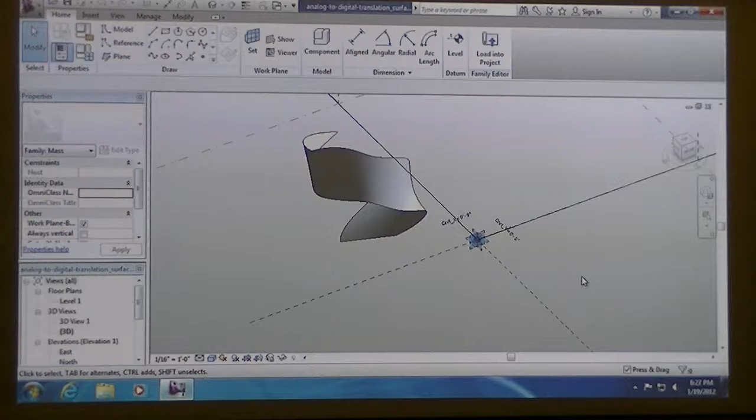It's not doing it. I need to find out a couple things from you. So we just need like a blank one up. Are we gonna follow you or just listen? Yeah. You just need to open up a new conceptual environment for today, a conceptual mass, and we'll work in there.

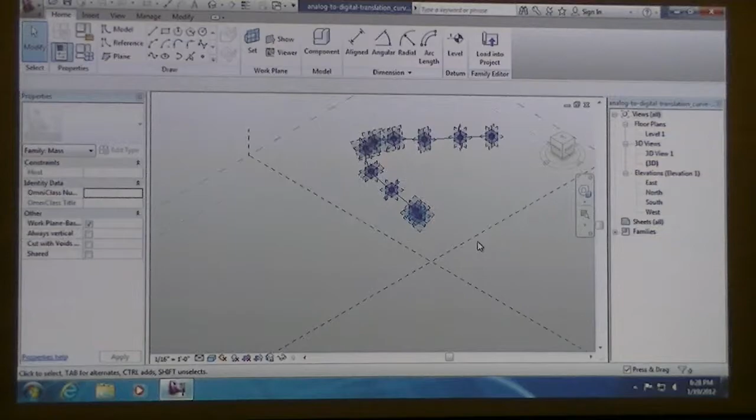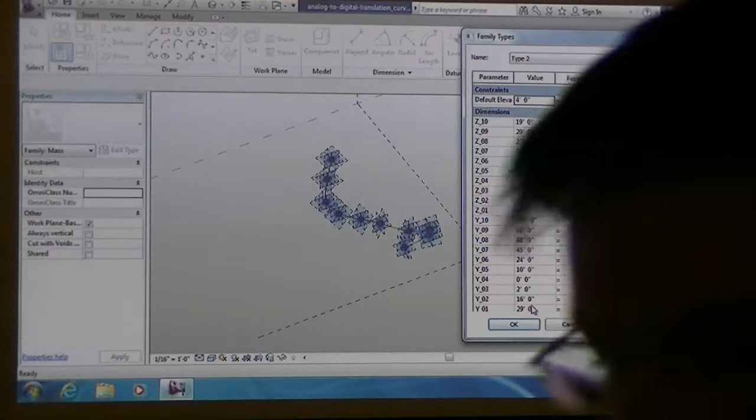All right. You almost got everybody. Looks like we have another computer running. Yeah, whatever number that is, number 2 maybe. Brian, you can move up to number 2. Right. Yeah, but I was working with you. I mean, it'd be amazing if everything just worked at one time. Welcome back, Rusty. Welcome back. Thank you. Oh, the computers that were not working.

All right. So, what kind of issues are we having? What kind of issue are you having? I need some therapy. I think I've heard maybe three issues so far, and I'll go over them, and then maybe you guys can add on to them, or maybe you say you've already resolved them. Number 1 is some people are having behavioral issues with their spline, meaning that you have all of your points and it wants to connect them in different ways than you're expecting them to.

Anyone having that problem? Mine's lofting the different splines not in the order that I'm clicking them. It will spline between the points correctly, but then when I go to connect the lines together, I think I came to like the 8th one I made. If I added that one, it would just completely change the order, even if I clicked them in the correct order. Okay, so you've got a series of section curves. Yeah. And the first 7 I made, it was doing them in order, and then I made another one, and whenever I tried to add that one, it completely changed the order of the connections. Okay.

What about accuracy of placing your section curve? Once you've made your curve, you should have a curve type that you've experimented with, and you've got a series of points and maybe some parameters. And if you bring that in to the other environment, like we did in class, we placed it attached to another point that we can move. Some of you were talking about, is there a way to make that a little more accurate as far as how to place that curve? Anyone having issues with accuracy?

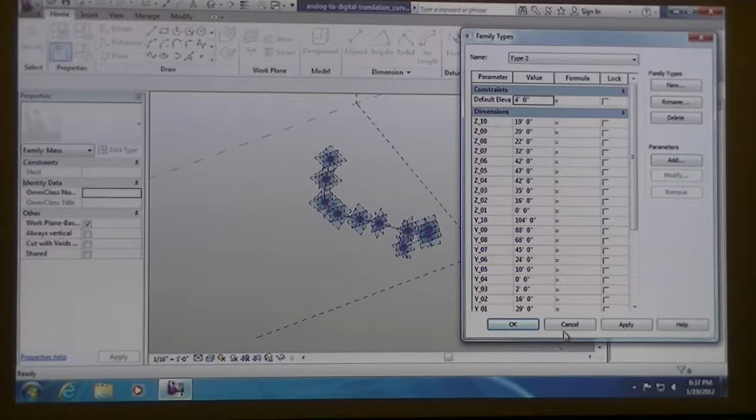So one of the things to solve the issue where some of you have had some issues with your spline: you've placed all of your points, you've got all the different parameters happening, and what you don't see here is I've turned off my dimensions in my visibility graphics so that I can actually see what I'm doing from time to time.

So, remember to hit VG, and this allows you to look at model categories and annotation categories. Anything that is a dimension or a text or any kind of label is an annotation. And so it gives you the ability to turn off your dimensions and things like that too. So if your drawing really starts to get kind of heavy and you just want to see the final product at the end, you can just turn off the dimensions in your visibility graphics.

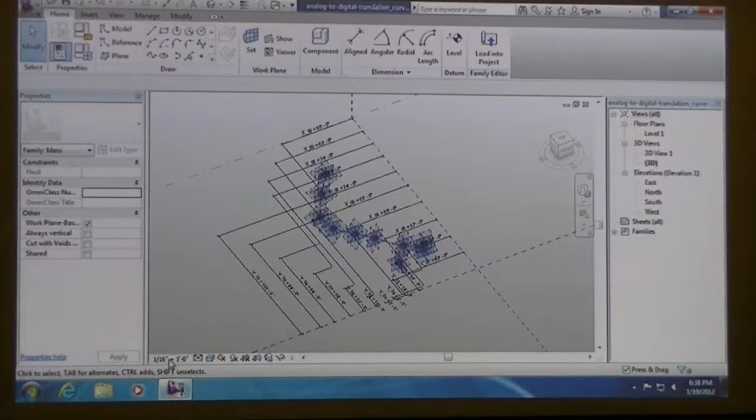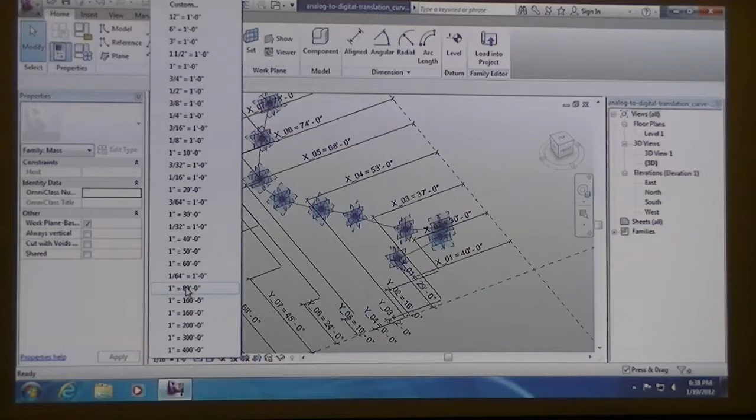The other thing is down at the bottom, I think by default, this is set to be something like, maybe 16th is probably the default. If you happen to have a lot of dimensions and these numbers are really big, you just change your scale down at the bottom to something like quarter scale. You can see how the text and everything that was associated with the annotation scales down.

This is still shown at full scale. It's just the annotations have scaled to show up as they would if you were to print at quarter scale. That's really all that scale is saying. But what that does is it allows you, when you start to really get a lot of different dimension strings and everything associated with your family, sometimes you might just want to bump up the scale so that you can actually read and still see what's going on.

So what I'm going to do is, let's close out of what I'm showing you here. And if everyone can open a new conceptual mass, I'm just going to go over a real quick process of where I would probably start, and then maybe you guys can share a little bit of your methods, whether you've done it in a similar manner or if you've got another strategy that you're looking at.

The first thing to solve is the idea of where's our origin point going to be. So I'm looking at my floor plan, and I'm associating it with my analog model. And I want everything to be associated with the lower right-hand corner of my model, and I'm just picking that. You guys might have to pick a different one, but essentially I want everything to grow in the Y and the X in this quadrant, sort of the northwest quadrant when looking at a floor plan. You might want it to grow in another way, but basically the point is you want to be consistent. You want everything to be growing in one direction.

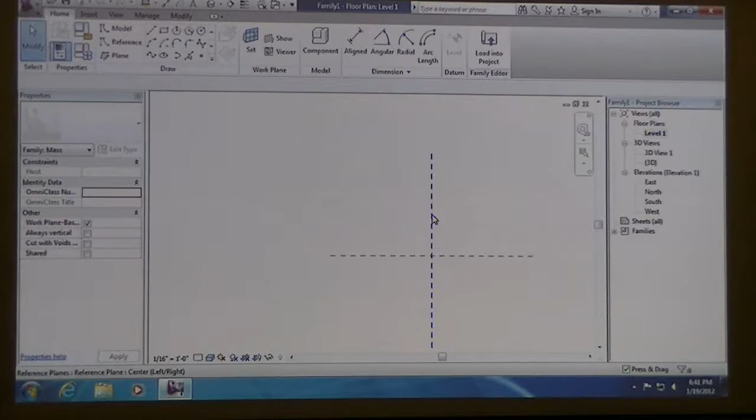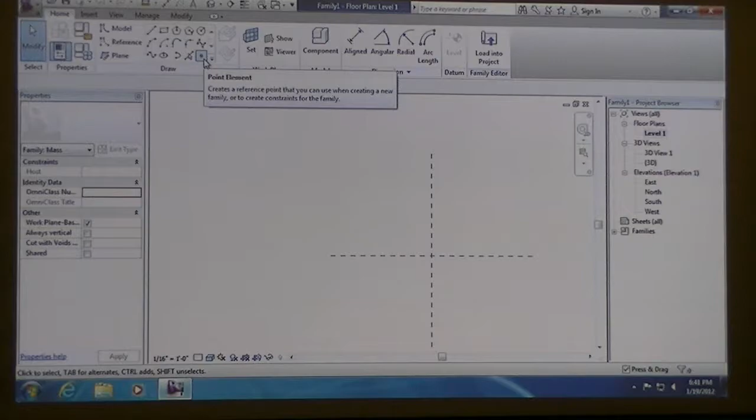If you've got points kind of going back and forth, it's okay, but you just have to realize that you're always going to be stuck with that point being manipulated only in that quadrant. So just think about that as you start to set things up. But because I said I could do everything in 10 points, I'm not going to go over every point and how you might do this. I did it in my lunch hour. It would take us our whole class right now.

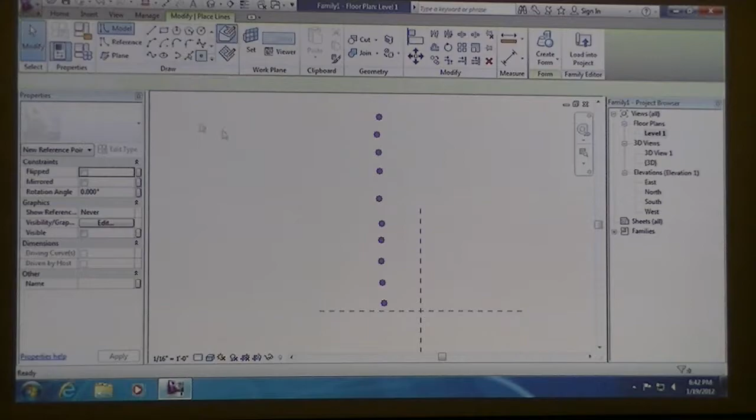But I want to show you that, so I know everything's going to be in this quadrant. Before I even start, I know I'm going to have 10 points. I'm just going to go ahead and place 10 points throughout this quadrant. Let's see, 1, 2, 3, 4, 5, 6, 7, 8, 9, 10. And then I'm going to select them all and turn on my reference plane.

Before I start manipulating where all of these points are going to end up in space, I'm going to select them all and create my spline through points. By doing this, I've already established the order in which that spline is always going to travel, and it won't ever act in a random way. Revit doesn't understand how to connect all of the points if your curve gets too complicated, and it has to do with the algorithms programmed into the spline tool - it's trying to take the average between two points, finding the closest and the average mean, and that's how it decides how to connect all the points. If those numbers get manipulated in an obscure way in the computer, that's when you get into behavioral issues. By doing this, all our splines will always act the way we want - it'll act in the order.

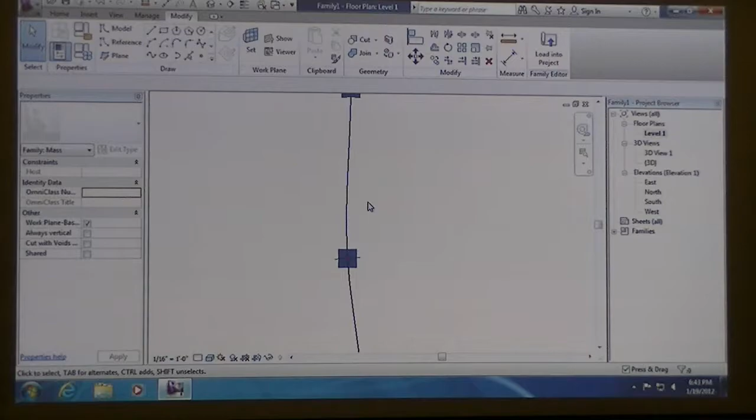So once I've done all that, I'm going to select all these points again, and I'm going to turn off the show normal so that I get all my X, Y, and Z planes on each of those points.

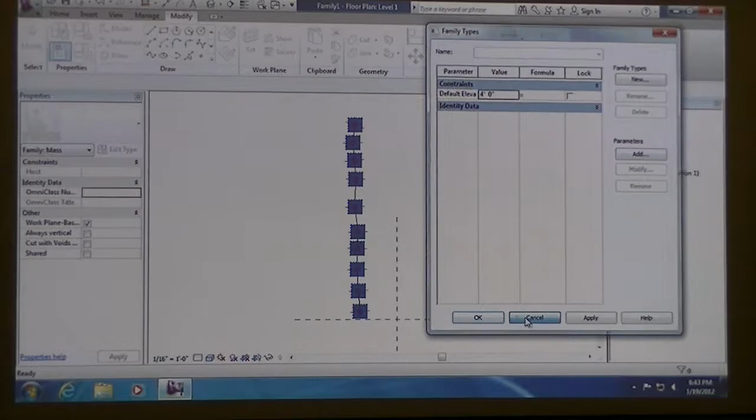Now the next thing I would do is, well, you can do two things. You could go into the family types and start setting up all your parameters - you know you're going to have an X, Y, and Z for each point. This is going to take a little bit of time, and I'm not going to go through every point right now because I've got the file I can show you. But for what we've already done in class, you set up your X, Y, and Z for each of those points, and then you can go ahead and start doing each dimension.

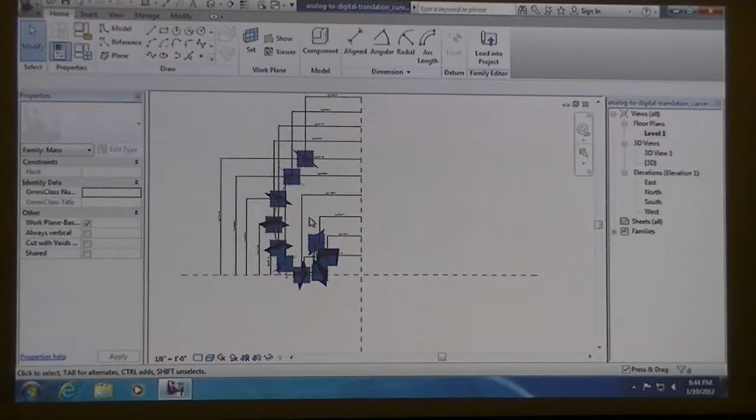What I'm going to do is just load up my other file so we don't spend a lot of time here, and you guys can just look up above. So what I did is I set up - you could do it this way - I named these basically X1 through 10, Y1 through 10, and Z1 through 10. You could also just say 0.1 X, 0.1 Y, do all that stuff, whatever you want to do. But once I establish that...

I can then just start making all of my curves - let's see what I have here, my dividers. You might pull out a set of dividers or your ruler or your scale. And I've established that this is going to be at 16th scale.

You can essentially say, okay, for the first point I've marked on my form, I'm going to go from this 0, 0, 0 point - how far over is it at 16th scale? That's the number I'm going to enter into my X1. Then I might do my X, Y, and Z, but I might just do all the X's of the point, so I go to point 2 and follow it all the way around. I keep going back to this corner point, referencing how far this point is from that corner in the X direction at 16th scale, then do the same thing in the Y, and then the same thing in the Z.

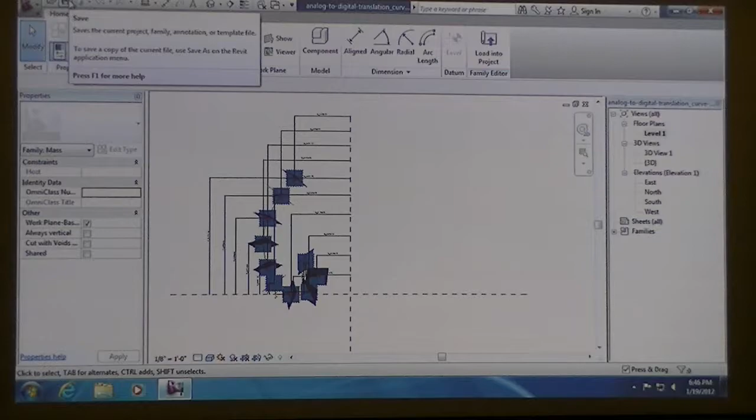And that will program one curve type, then I would just go back. Once you get that set, or enter a couple of these values, I'd hit apply and OK, and hit save, because once you've got that dialog box open, you can't hit save. So every now and then you might want to close out of the dialog box and go ahead and save your work. Once I've established type 1, I might go to type 2 and start a new family type, and it's just a matter of doing the same exercise. I could do that for every single curve - all I'm doing is programming this one curve to act like every single curve on my model.

And then this way, when we actually bring it into the new environment, it's just a matter of selecting that curve and placing it on the reference point. So you use the one curve, but you'd still measure all the other curves. I'd use the same curve, so I get the same parameters, but when I'm on point number 5 of this curve, my x and y is definitely a lot different than on point 5 over here. So basically that's all that's happening: how far is that one point occurring?

And so what you really have to do, since it's going to be one curve, is establish a worst case condition and say, how many points do I need to make that worst case condition? So for instance, on these very simple curves, yes, I could probably do them with less points, but I still need to use the 10 points so that I'm still using the same curve.

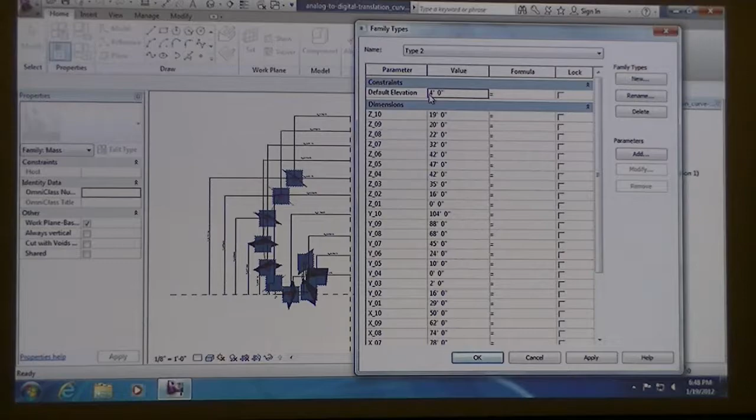So I saved my original starting point. You can see this was how I started off. I just had everything up in a line, and that's where I established all of my dimensions. And then from there, I have my type 1 curve, and then my type 2.

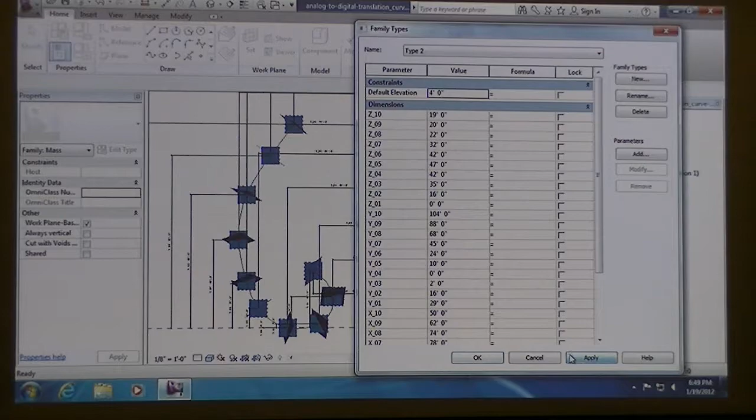And then from that, once you're done, let me show you a method of how we can place this into the next environment so that we ensure, again, that we're using the same reference point at the 0, 0, 0, which will help you place your initial curves to really replicate what you've done in an analog model.

So what I'm going to do is keep this open, and then I'm going to go into user interface and start a new conceptual mass.

And I'm going to place a point, and I'm just going to place it up here in the space. Doesn't matter where at the moment. And maybe you guys can all place a point too in your own conceptual mass, because I'm going to show you some new tools that might help you work in this environment.

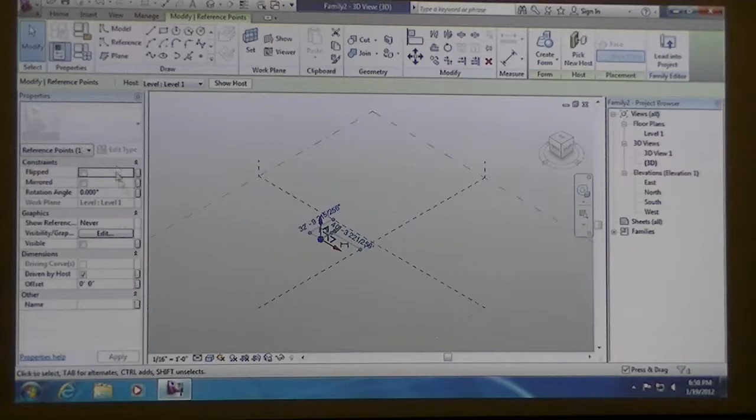So once I've got this point, I'm going to turn on all of my different reference planes that are associated with it. But in order to get this to be precisely at 0, 0, 0, this little crosshairs, I'm going to use what's called, under modify...

You have all of your transform tools up here, which are your align, your moves, your offsets, mirrors, copy, and trim and extends, and scale. These are all your ways of transforming any kind of shape that you have or line.

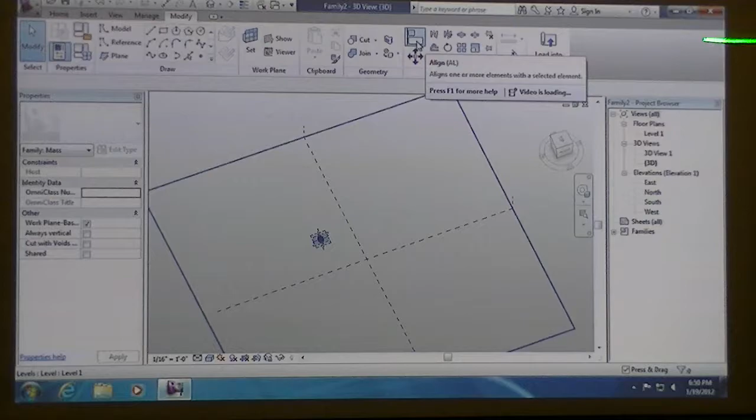But one thing that you'll use a lot is called the align tool. The align tool is actually made for, well, what it says, to align one element to another, but it's also made to lock and set up constraints later on when we get into that. So we're going to be using this tool often, so you probably want to just figure out its methods of how you actually would use it.

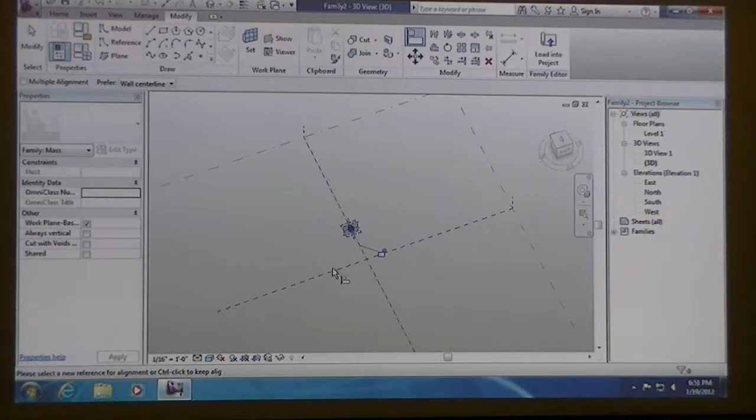What it's asking you to do, you can look at the lower left corner of any tool that you pick, it always shows you what it's asking you to do. So it's basically saying to select whatever you want the main object to be that you're eventually going to align this point to. So first I'm going to pick one of these planes, and then I'm going to pick the parallel plane of the point. And then I'm going to do the other one and this one, and that ensures that I'm now at 0, 0, 0.

And by default, this point has an offset at 0, so I know I'm right at that intersection.

I have my other curve worked out, and you might not have a curve to bring in, so you may have to follow along on the screen. I'm going to load this into the project, and in order to place this curve type 1, remember that in the curve type 1 or curve type 2 family, I established everything off of an origin point. Whenever you're placing any kind of family, you're placing it always by its origin point, which is this 0,0,0 in that file.

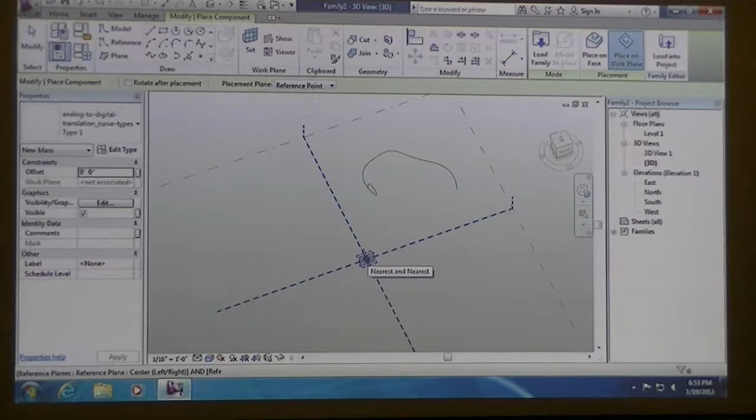So if I place it at this 0,0,0, it'll be exactly in the same position it was on the other file. What I want to do is place it on a work plane, so I need to pick place on work plane. Then my placement plane, I still need to pick this point or this horizontal surface. I'm going to left click, and when I left click, it's now asking me where to place it. If I hover over 0,0,0, you should get both of your crosshairs to highlight, meaning you're snapping right to the 0,0 plane. I'll hit left click.

Now I have that curve exactly in the same quadrant. I'm going to take this point and give it a name. I'll call this curve type 1, so that I know this point is always going to be associated with this particular curve that I placed.

Next thing I'm going to do is place another point so that I can place my type 2 curve. But before I do that, because I want this point to also be at 0,0,0, you'll often get an error.

It says, hey, did you know you placed a point on top of another? You've probably seen this - you have 2 points in identical locations. I always tell Revit, so what? I know I put those 2 points there, but it just gives you a warning once in a while that it's thinking you have duplicate objects. Sometimes if you happen to place too many things on top of one another and you don't need them, it's just giving you that warning.

I ignore that warning, but before I do that, so I have the ability to select this in an easy way, I'm going to take this point - if you look at the bottom of every view window, you have these little eyeglasses. The eyeglasses are your temporary hide and isolate commands. Anything you select, you can temporarily hide in the view. This gives you the ability to work, especially when you start getting a lot of things on top of one another in 3D, or even in 2D sometimes.

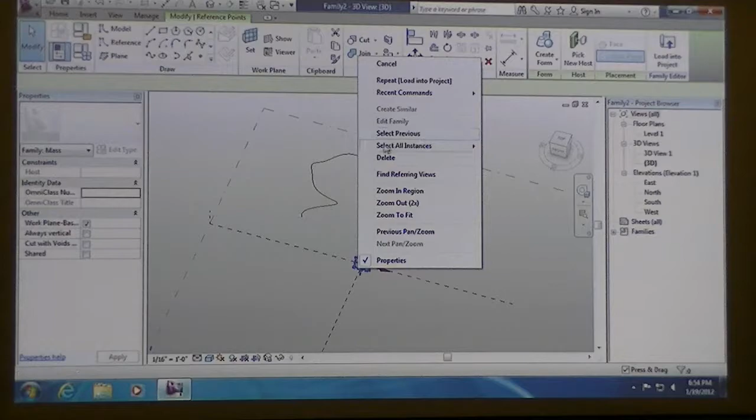You need to hide some things to isolate what you're working on. You don't want to do it in a permanent way, because sometimes you can right-click and say - this doesn't actually give you the option here. So in this environment that option's not there, but in the project environment, sometimes you can right-click and it will say you can hide something in the view. Once you do that, it's kind of hidden permanently, and you have to always come back and find it and unhide it from time to time.

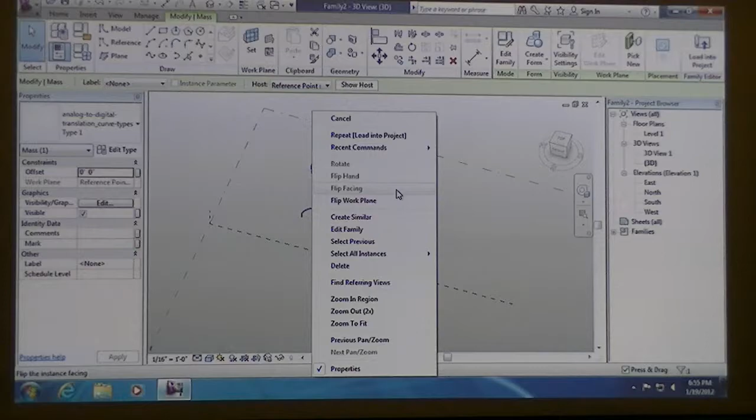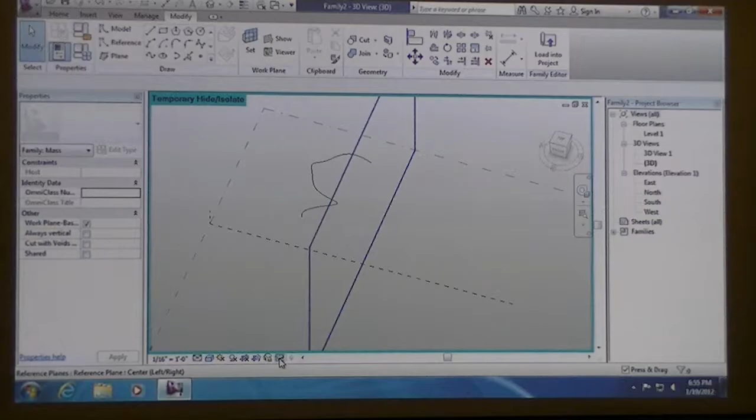If you do a temporary hide, I'm going to click on the eyeglasses and say hide element, it goes away. Once it goes away, you get this blue box around your screen, telling you in the left corner that you've hidden a bunch of stuff in this view that you're not really seeing. At any moment, you can come back to the eyeglasses and say reset temporary hide and isolate, and it brings everything back. The other thing is if you save your file, exit, and open your file back again, all of your temporary objects that were hidden are revealed again. So that's why it's temporary - it's not going to be permanent once you save it.

So again, I'll go back and hit hide element. Now I can place my other point, and I'll do it in the same manner. I'll just place it off into space, turn on my reference planes, and use my align tool. And there's my warning again - hey, there are identical points in the same place - and I'll say whatever.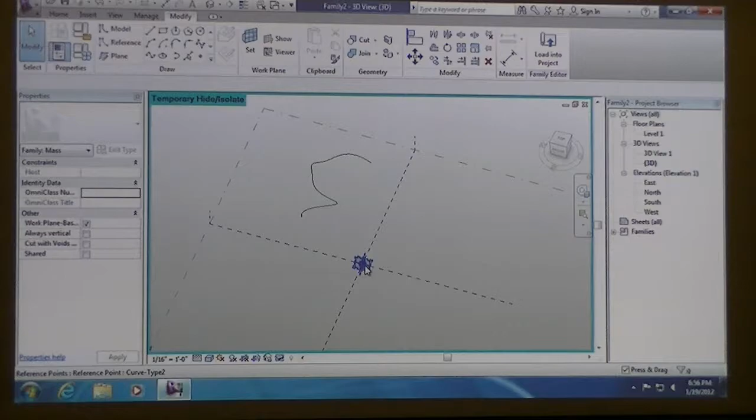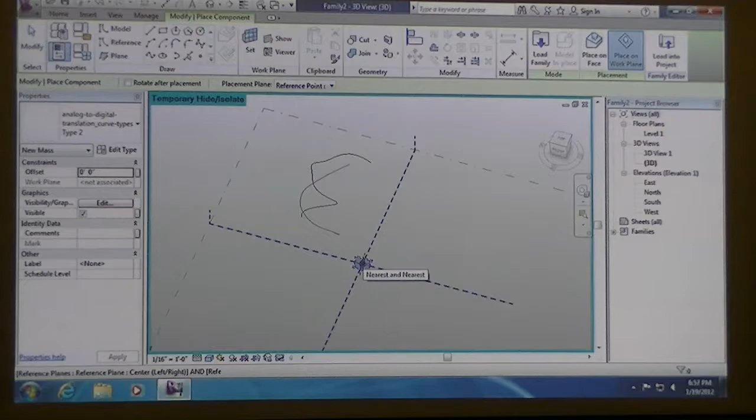Obviously, you can only have unique names. Now that I have that placed there, I can click on Home and Component, and because I've programmed all of my curves, all I have to do is pick my type 2 curve, again, place on work plane, and I need to pick it, and then make sure both of my crosshairs highlight. And so I should have both of my type 1 and type 2 curves as they occur in relationship to my analog model from that 0, 0, 0 point.

At this point I can go back and just reset my temporary hide so I reveal both points. And you notice when I hover over the points now, because I named them, when I hit tab, you'll see at the very bottom it says curve type 2. When I hit tab again, it says curve type 1. That gives me the ability to then select the different curves.

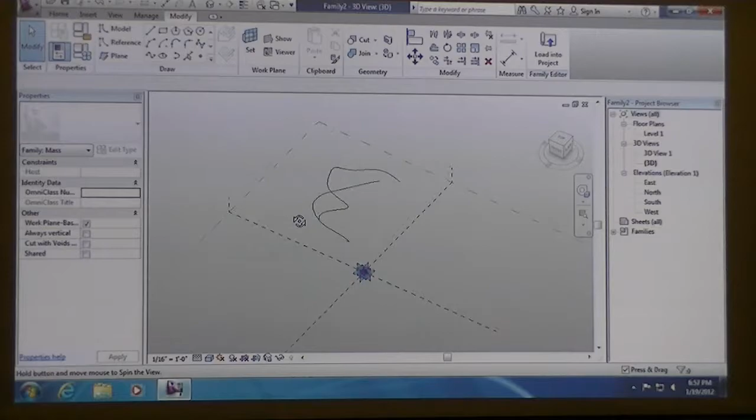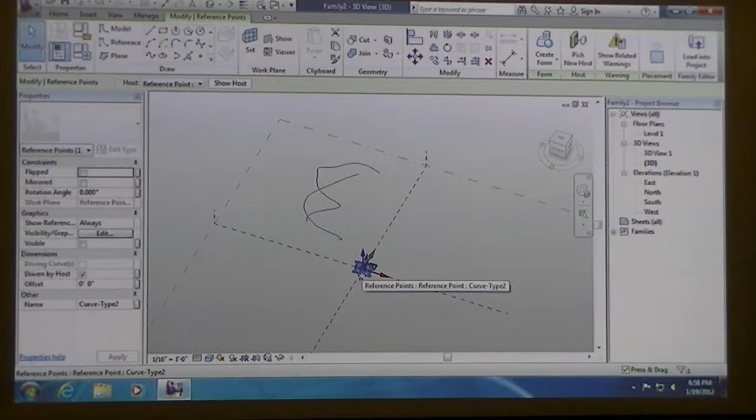And so you would put a point there for every curve. So say you have 10 different curves, you put 10 different points right there, so that we're always referencing that 0, 0, 0. And the reason for this is that it just gives you the alignment. Everything will always be aligned to the same spot. Then we can play with the position of this point later on, whether it's up and down, twisted, or whatever. Once I have these section curves, I can just hit Create Form and hit Solid Form, and then I've got my lofted shape.

Some of you might have a shape that looks orange. Anyone have an orange shape? Okay, I saw that. Anyone else? You have to make sure that when you do Create Form, you use the solid form and not the void form. If it's a void form, it'll turn out this orange color, which means when you actually bring it into any kind of environment, it won't appear because it's a void.

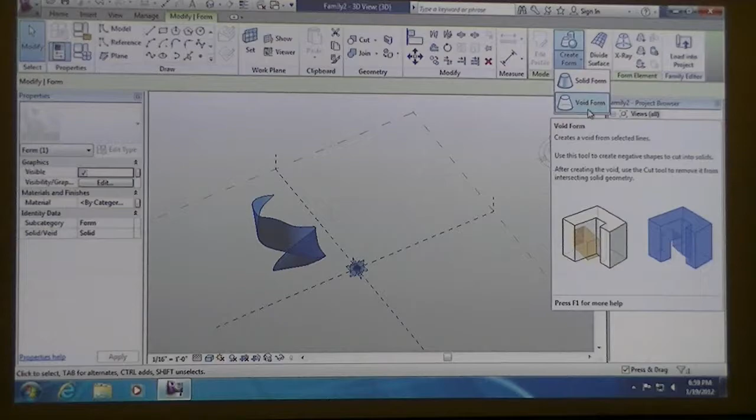It's invisible. If you happen to have an orange form or you've accidentally selected it, whenever you select your surface, you have these properties down at the bottom, identity data, that says solid or void, and it's set to solid. I can just click on this and change it. So if you accidentally have the wrong thing, you don't have to redo your shape, just change that property.

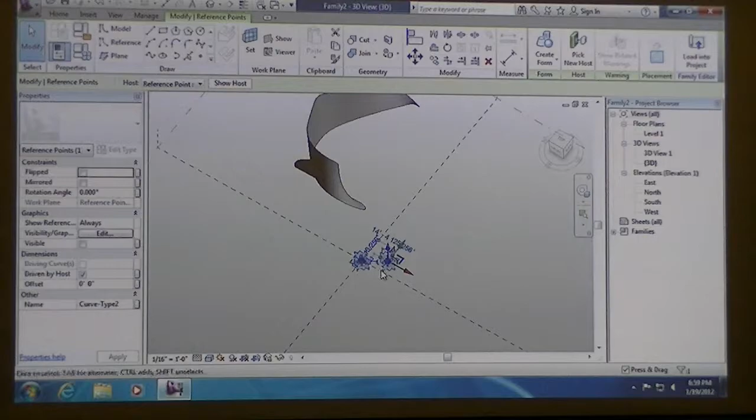Okay, so once I've done that, I'm going to go ahead and set up just a couple of parameters associated with these placement points. And again, I want everything to grow in the same direction. And so I'm going to move this one point, which happens to be my curve type 2. And I can set up another set of parameters in this file that just talks about curve 2. I'll just say curve 2x, curve 2y, curve 2z. Name's not important. And you notice I use the underscore a lot instead of using the hyphen.

Remember that I like to occasionally space out my numbers and all of that kind of thing. One thing is if you happen to have a parameter, let's say I have a space between curve and the number, later on when you start to use this in a formula, Revit's going to get confused and think that curve is the name of the parameter and that 2 is some sort of mathematical expression to be used. So a lot of times I'll either not put any spaces, or if I want a space, I use the underscore, so your shift hyphen. So anyway, I'm going to set these up real quick.

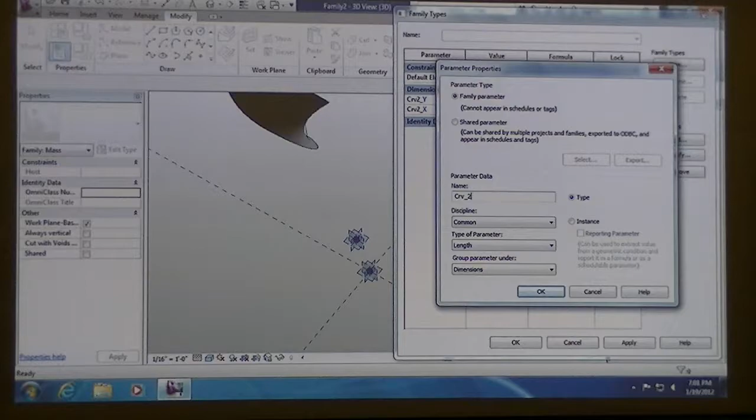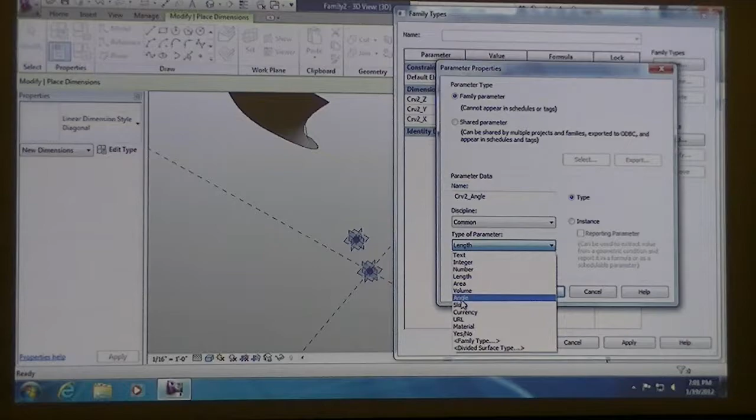Z. And then I can, oh, and since we're also doing a rotation, I'm going to also set up a rotation angle for this placement point. Make sure your type parameter is set to angle. And because I'm doing that, if I'm going to start to rotate my point and these axes around, I want to make sure that when I snap my dimension, I'm not snapping to a plane, but I'm snapping to the point. So I'm only highlighting that point. So you could always turn off those planes if you want, or just make sure you're snapping to that point. And I can change this to be my X, my Y, and then my offset is my Z. And then while I'm there, I might as well set my rotation angle.

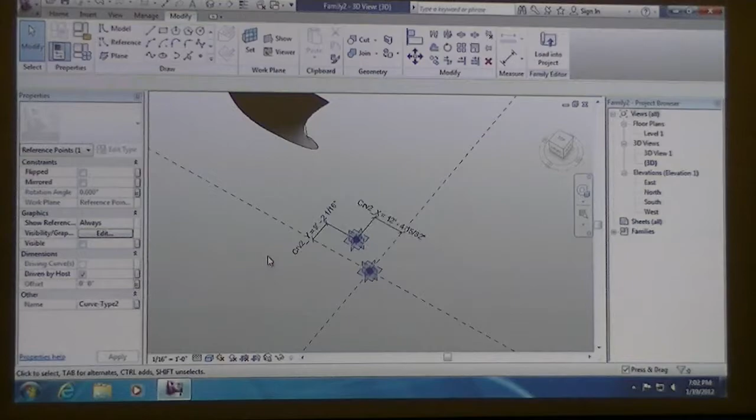So now I can test this out a little bit. Let me just rotate it a little bit, like 10 degrees. And you can kind of see that the bottom of my curve kind of kicked out a little bit. If I do a little more extreme. So because I'm just rotating that origin point and its placement, obviously my shape's going to be moving as well.

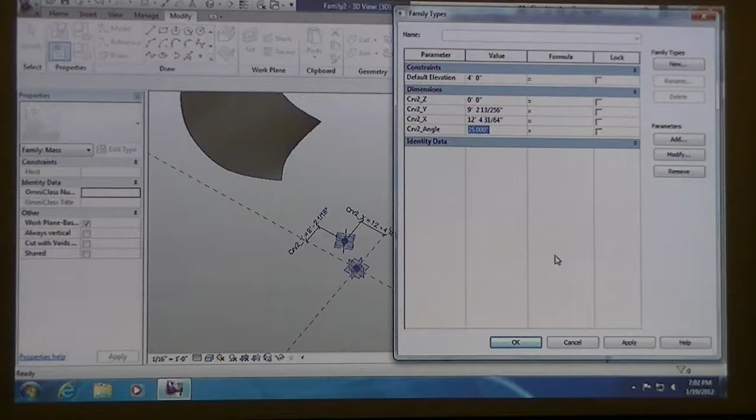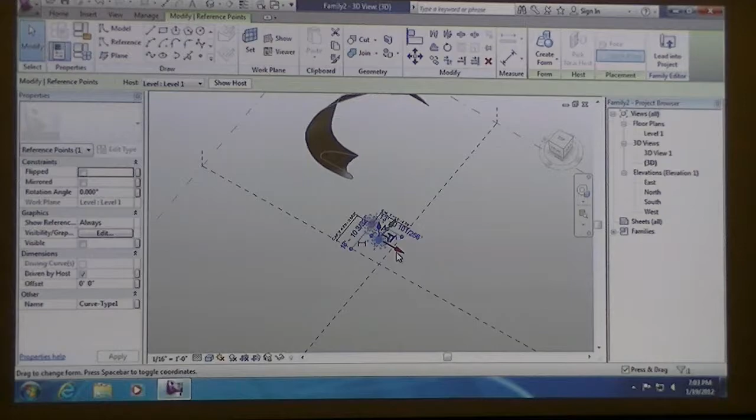I'll just keep that one there for now, and then I'll take this other one. And at first it's going to try to relate. The way that reference planes and reference points work in Revit is they want to reference something. They're set up to always be in reference to one another. So at the very start, you notice when I start to move this point, this other point is moving in direct relationship to it. That's just a default setting, but once I set this other point to have its own parameters, then that will kind of go away, and it'll be based on all the parameters that you've set up. So don't be too alarmed if you notice all of a sudden this starts moving around.

But what I'm going to do is the same thing for this point. I need to set up these other parameters. I wish there was a quicker way to set up parameters, but unfortunately, this is the way it operates. Do you do this kind of work in practice, like create families for a curtain wall or something like that?

Yeah. So in practice, working in the office, every little component that you bring into your work environment in your project is a family that has a set of parameters to it. If you go to revitcity.com, which is a forum where people upload a bunch of models and you can download them and insert them into Revit, there's a lot of bad models in there. You have to be real careful because there's a lot of people that don't set up anything with parameters.

So you get these one-off objects. If you really want a really big file, if you have, let's say, a door or any kind of element that's going to change size quite frequently, try putting it in one at a time because someone didn't set it up with parameters, and that's basically putting in that object one at a time into your file and just adding to it. Whereas you could just have one little 300 kilobyte file that's actually making 100 different things in your project.

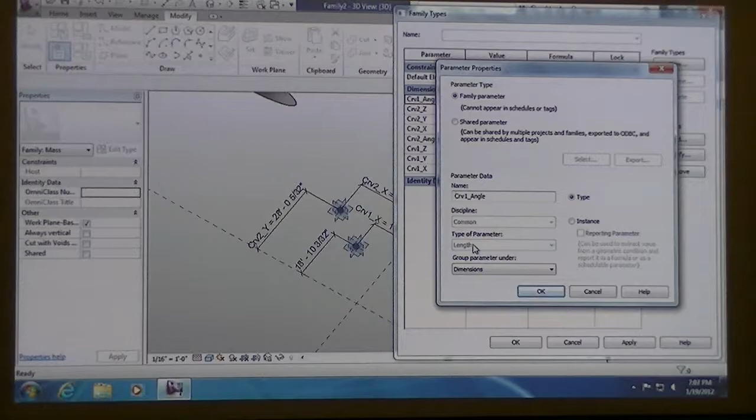And let me set up this other point, and then I'm going to get into. Your curve 1 angle is still length. Oh, is it length? Yep. Yep, that's not good. And what's frustrating is once you set up a parameter, you can't change the type of parameter it is. You think you could do that, so I got to delete this. I'm going to copy and paste. Say copy, Control C. I'll remove this, and then when I add my parameter, I can just Control V the name and make sure this is an angle.

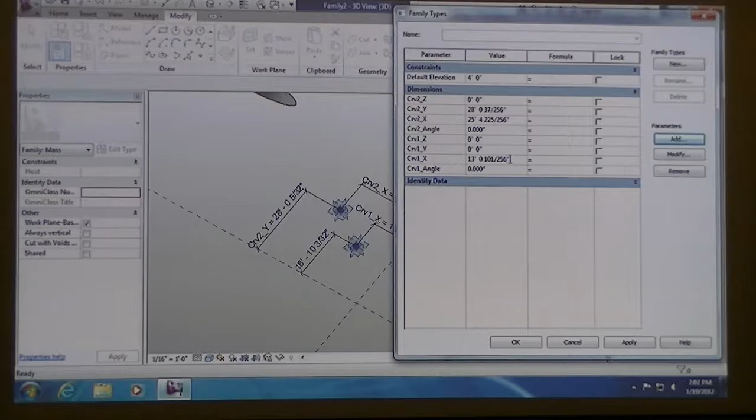Also, another thing that might help is that Revit has a built-in calculator, so that if for some reason you don't want to have to figure out with your own calculator, okay, I measure this as 2 inches, and obviously I can do the math in my head that that's 32 feet. But let's say I have 4.75 inches. I could type in equal sign 4.75 and then say times, where's my times, 16.

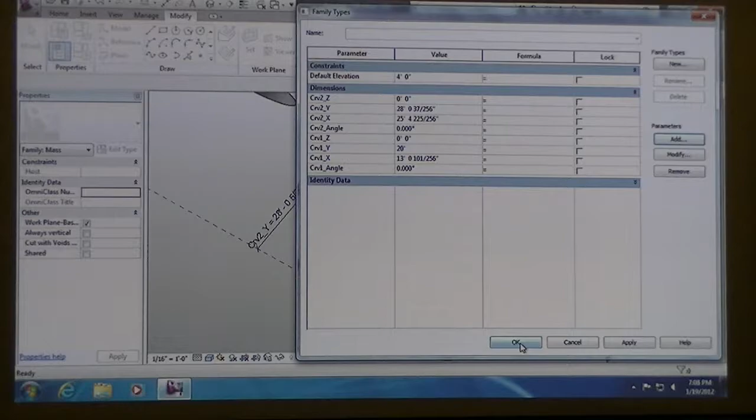And it gives me my 76 feet instead of trying to do all this calculation and then type it in. You're kind of doing it twice. You might as well just do it right here in the formula in the box. So just make sure it's in the value when you do the equal sign. Otherwise, the formula wants you to do all these other things. So anyway, I'm going to take that back to whatever it was, 20 feet. And I set those up. Okay, everything's good.

So now I come back here. Let me take this to my Y. Take this to my rotation, and my offset. You notice that when I go into the offset, my angle parameters weren't available. When I was in my angle selection, none of these other parameters were available. That's how it knows what you're going to be selecting. So I could take all this back to 0. There we go.

So that's what I would do for all of your curves in your model, is if you can do it all with one curve, you'll save yourself, I think, a lot of time. Instead of having to make all these individual curves, you're just figuring out what you're typing in for each of those values. And then later on, we can change those values.

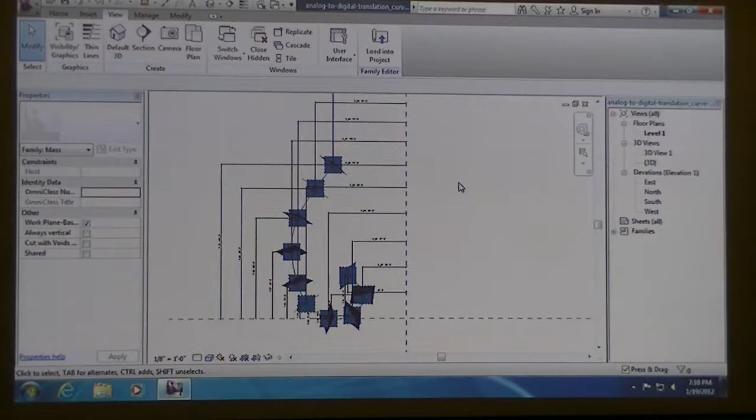What I want to go over today is what is the difference between a type family or a type parameter and an instance parameter. You'll notice that when I'm in my curve, and you might want to load up your curve that you've made just as a reference, is that when I'm in the Home tab and Family Types and I add a parameter, one of your options down here is a type and another one is an instance. Then under instance, there's another thing called reporting parameter. We're not going to get into reporting parameters right now, but I'm going to tell you what all of these different parts are.

A type parameter is always associated with a family type. So a family type is when you've entered in all your parameters and you've hard-coded whatever the values are, and you click on family type and you hit new, and you've named it, that's one family type. That means that these parameters, because they're type parameters, are always going to be associated with a type, and a type is based on a pull-down selection menu. So you've seen so far that when you bring this in, you basically select, I want type 1 or type 2 or type 3 or whatever you've named them.

An instance parameter is a one-off set of parameters that are associated with the curve. For every time you place that curve, it has its own instance of parameters that have to be entered. What that means is you can have some of these things that are customizable within the other file instead of having to come back here and keep changing the values and then re-importing it every single time. But there's some positives and some negatives to working in both of these ways, and I'll just kind of showcase what you can do.

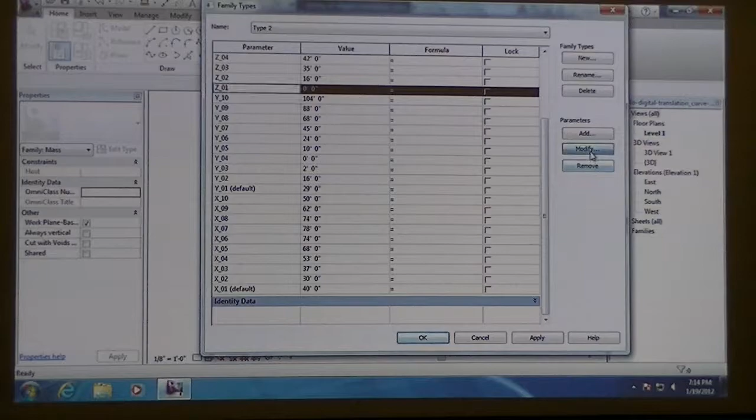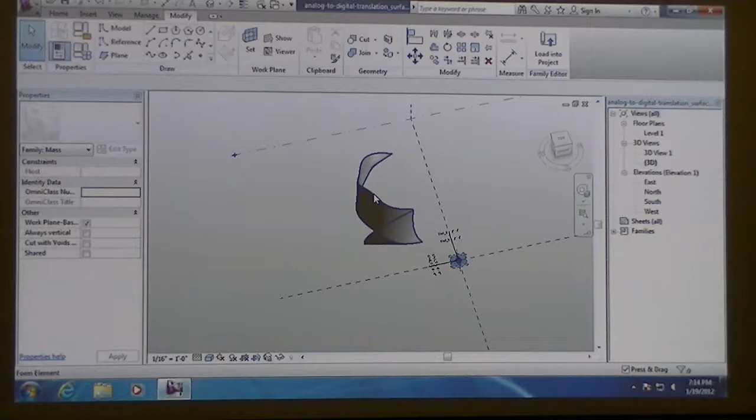I'll hit OK. And I'm going to rename this file just so I have a different set of files. And I'll call this one has instance. This way when I load it into my other project, I still retain my other curves just to show you the example. So if I click on the curves that I've already placed in this other file, look off to the left, I have only these set of parameters available, and I have my pull down menu where I can select different types. If I want to edit this parameter, I can come into edit, and I can actually do the change here instead of loading it into another or opening it back up. But basically you're changing it only within this file, and that's fine, you can do that.

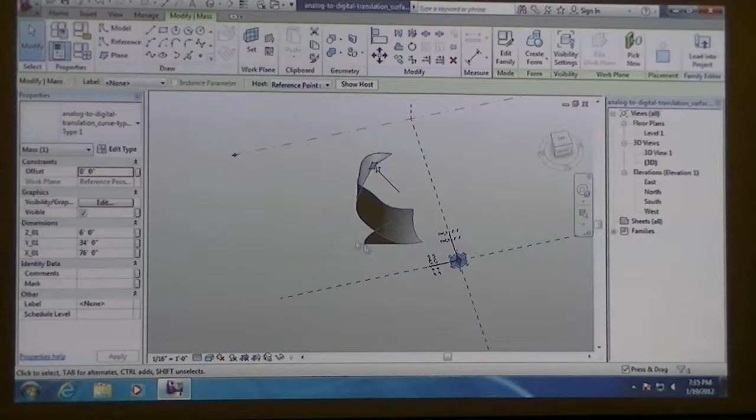But if I change this to my instance family, my type 1, it's still the same curve, but now look off to the left. Because this was an instance that was placed, I have these parameters in here that I could actually change on an instance. If I were to place this curve one more time, I'll say create similar, I'm just going to place it off to the side. Looks really different. So I've got all these values over here. If I change this value, let's change this to like 50 feet. There you go. You see how this curve changed? But this one didn't. Even though they're the same type, that's because they have their own instance items that are customizable within this family.

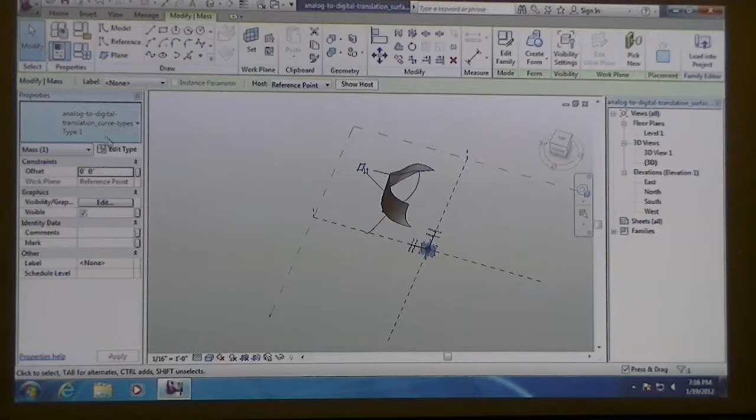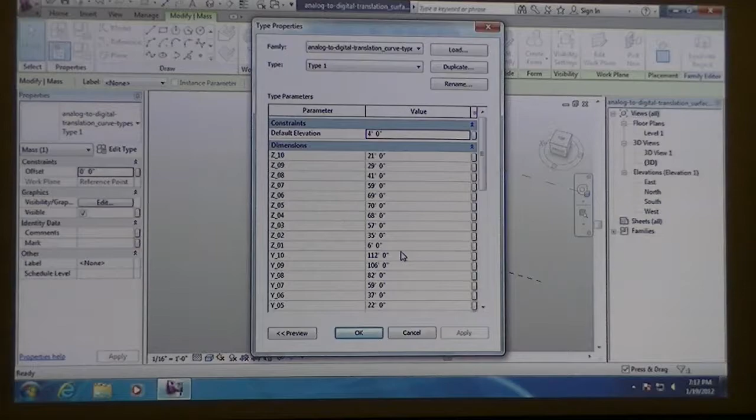If I change this back to my type that doesn't have the instance available, I see it's just really far up. The same curve, if I were to go into the edit type and then manipulate these values, all of the times I've placed type 1 curve will update. It's like component and groups in SketchUp, I think. Right, yeah, just like in SketchUp you got components, groups, just like in AutoCAD blocks and Rhino blocks. If you make a block of something, if you edit that block and you've placed that block 100 times, all 100 pieces are going to change as well.

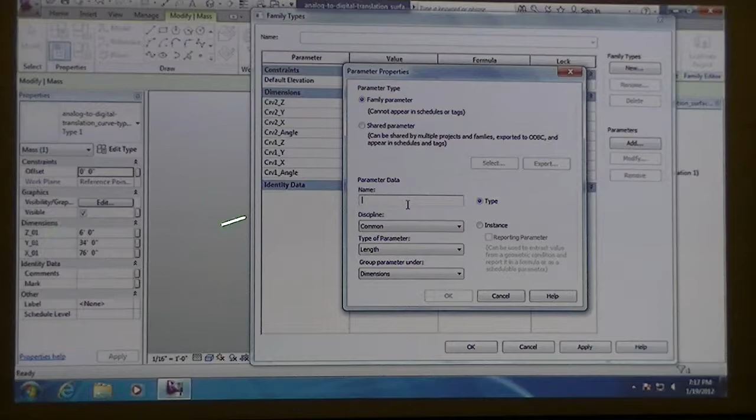I could, with this instance param or this instance, use this little button to make it equal to something that's going to be only customizable to a type of surface. I'll kind of explain what that means in a moment. So I'm changing all these to...

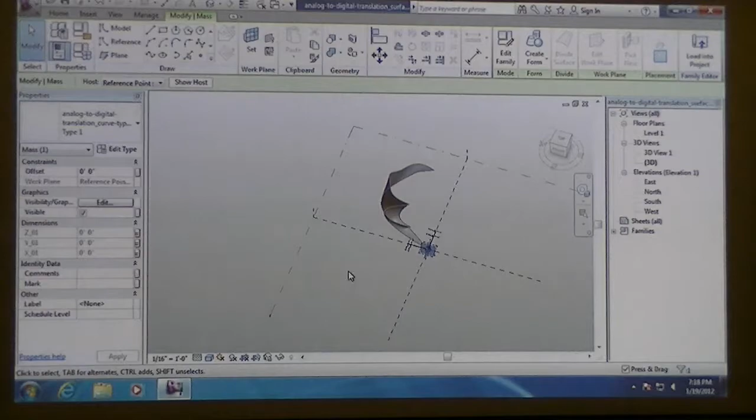You put that one on Z instead of X. Did I do that? Mhm. It's been a long day. X. No, it should be Y. No, it should be Z.

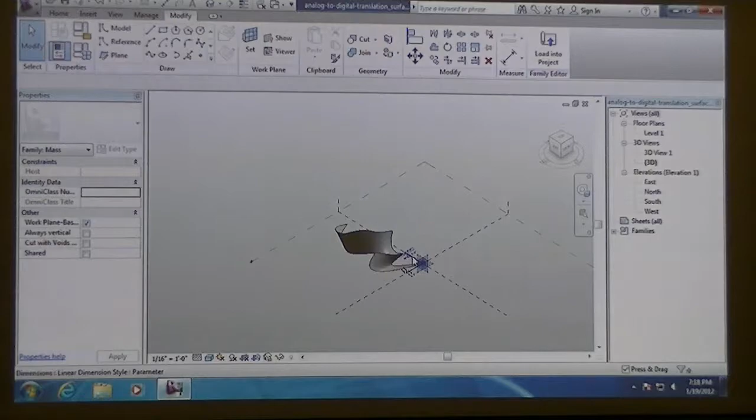Okay. So it changed dramatically because whatever that point was, point 1, basically in this default setting, it's all set to 0, 0, 0. That's why it went back to whatever. But if I'm setting up new surface types within here, I could have those same points equal to something else. Like that. Maybe that was too extreme.

So anyway, I can set those values here now because I've made them an instance and then made them equal to parameters over here. This is kind of a way of importing parameters from one family type to another, because instead of having to work with, let's say, 7 different family files, you'd have to keep opening each one up and editing them, or using the edit type command over here.

So just another trick, you can later on always change which one is an instance and which one isn't. You might decide later on in your design process that you always want point number 5 for some reason to be customizable in another setting, and that's why you would start to use an instance. Everyone kind of understand that? Understand the concept? I'm not saying you have to use it, but it's just another tool for what you can do.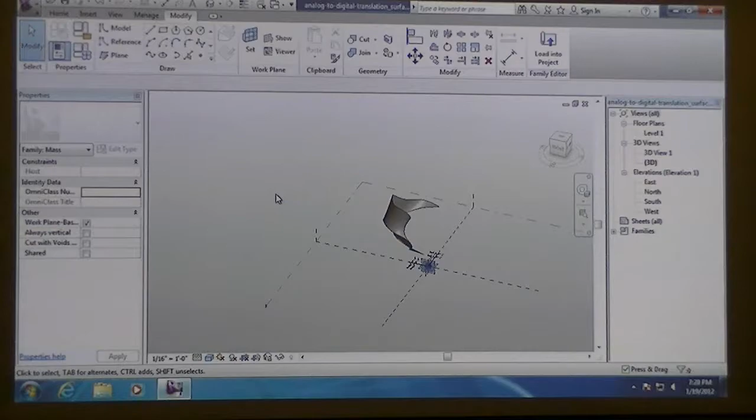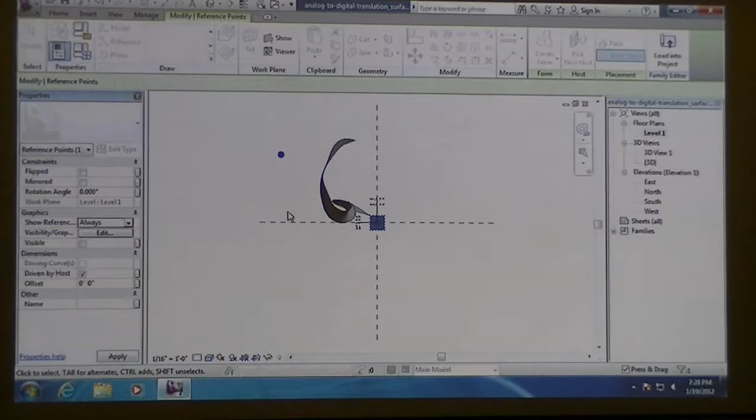In this setting, if you were to bring in that instance curve again and have it in the file twice, would you be able to edit the instances individually? Would they each be standalone, or if you edit one, would it change the other? So if I bring in, let me place another reference point, and let me bring in another component, and I want my instance version, type 1.

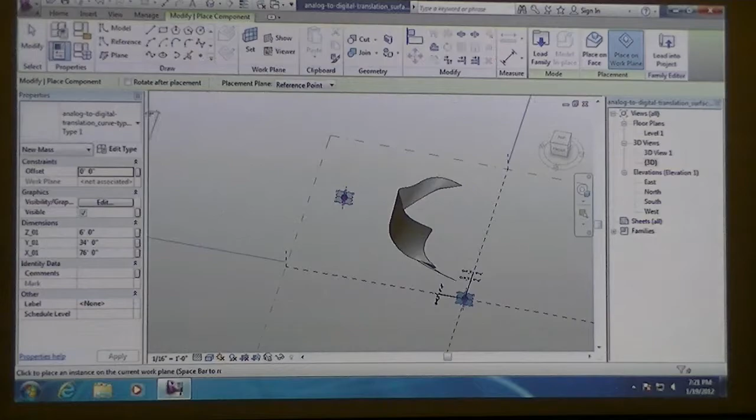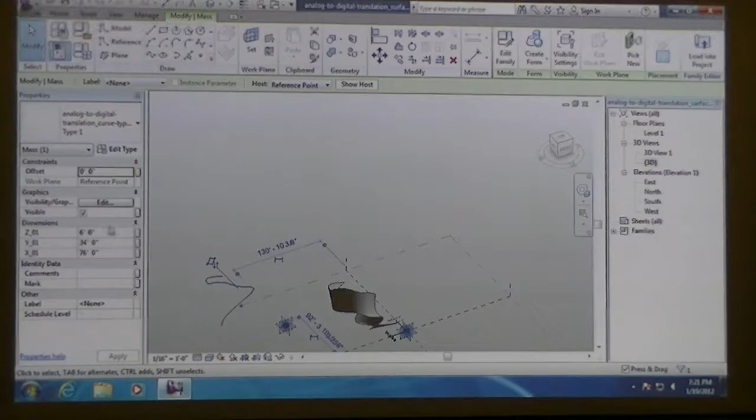So I guess what you're asking is if I don't associate this particular instance with these buttons, and I change these parameters, only this one curve is going to change. But if I went back and I actually associate these to the same, the Z, and then the Y and X, now if I'm in this environment, it's going to change both of them because they're all equal to that same parameter. So if you wanted them to be different, you would just keep doing the edits over here, and you can customize it that way.

Another example of what we can do with all of our different parameters: you notice off to the side, we've been working with the value column. You can also start to think about your project in a computational manner where things have some relationship to one another through a formula. That's basically computational design: you have a set of points or objects that have some relationship to a parameter that is changing and has a mathematical equation associated with it that then changes the rest of the form.

The way that this works is, let's say I always want, whenever I change my Y9 component, my Y10 to be 25 feet away from it at all times. All we have to do is, in the formula section, you notice there's already an equal sign, so we don't have to type in equals again. We can just type in the exact name of the parameter, and then your mathematical equation, I'm going to say, plus 25 feet. So you saw that number change to 113 feet.

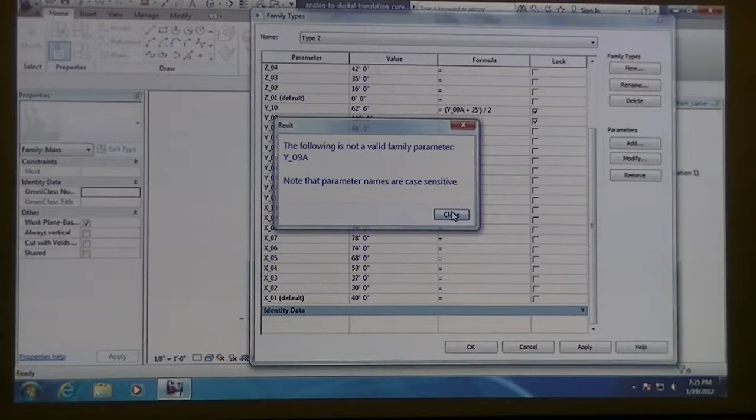That's also why, if I change Y9 to be... let's get rid of this formula. Let's say I named my parameter Y-9, and I come in here and I want Y-9 plus 25 feet.

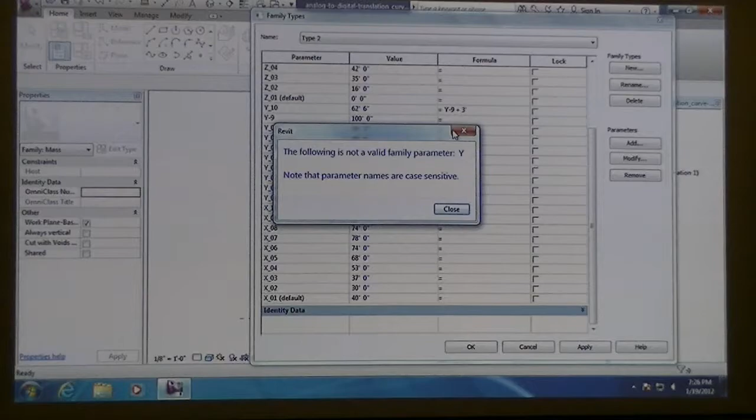It doesn't know what that is because it looks like a mathematical equation, and there's spaces in there. I think even if you took out the spaces, it would still give you that error. If I say Y minus 9 plus whatever 3, you still get it because it's still looking for the Y parameter, and it doesn't understand that the rest of it was supposed to be part of a name. So whenever you're using numbers within a parameter, I like to use an underscore to separate it.

What if you make that... or you can just take out the space and call it like Y9, and that should be fine. What if your value becomes associated with a formula and you make it an instance, how does that affect that?

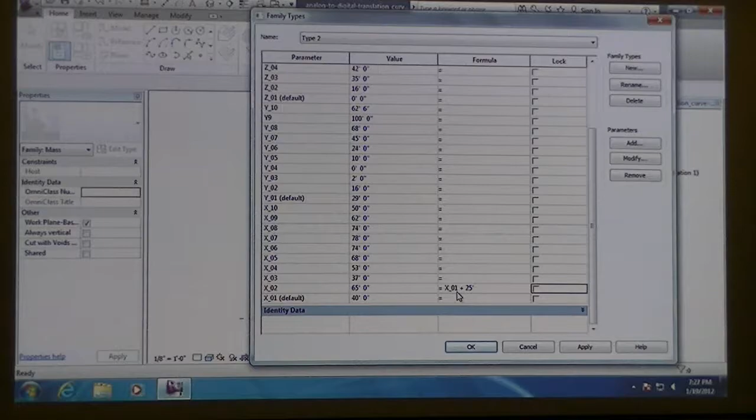Yeah, so the way the formulas work is only instance parameters can reference instance parameters, and only type parameters can reference type parameters. So for instance, my X1 is an instance parameter, and my X2 is a type. It should yell at me when I exit out of this. It'll exactly tell you that. It says my instance parameter can't be used for type formulas.

And the reason for that is, your instance parameters are one-off customizable, and the type one isn't. Yeah, so they can't kind of cross over one another. So if you get this error, that's why it happens.

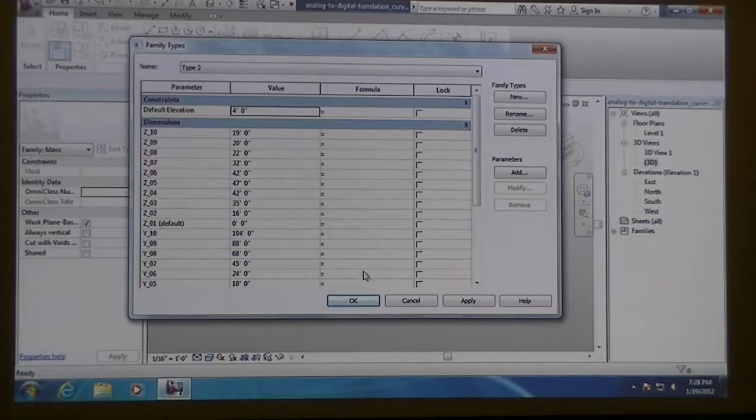I'm kind of going over parameters in general, just to show you some different options. Another one that I don't know if it would come in handy at the moment, but there is a yes/no parameter. I'm going to call this 'show curve' for now. And if I do type parameter and call this yes/no, you get this checkbox.

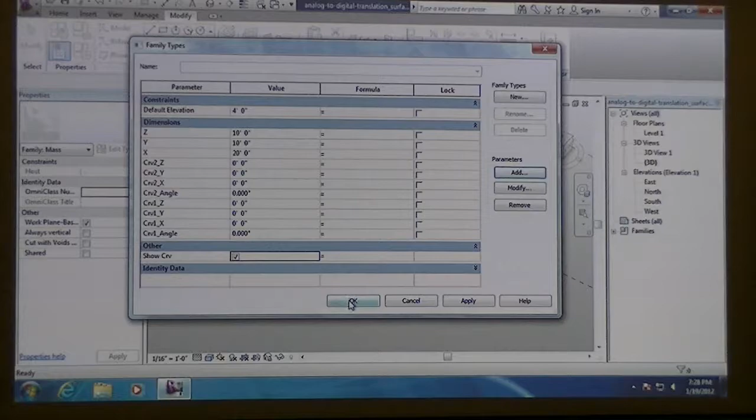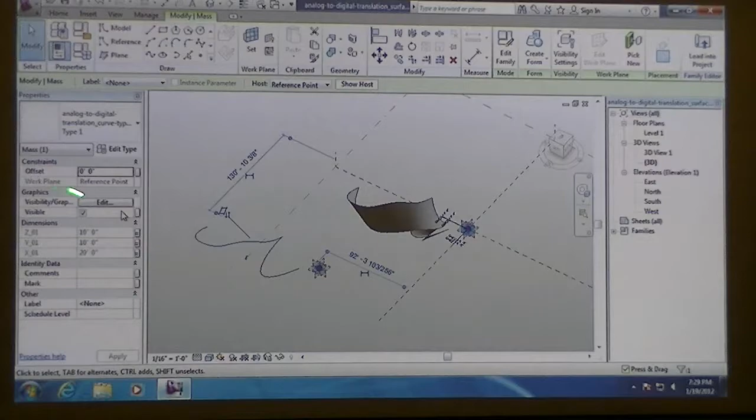This is basically a visibility option. So I could have a family that happens to have a couple of other surfaces associated with it in this particular type. If I click on this element, you'll see you always have a visible parameter, and there you get the button. I can have this reference the show curve yes/no parameter.

Then in my type, I can either make it checked or unchecked. So I'll call this one type 1 has it, and then do type 2 and uncheck it, hit apply. You notice it doesn't do anything here, it's still there. That's because that parameter will only work once you've brought it into your other environment.

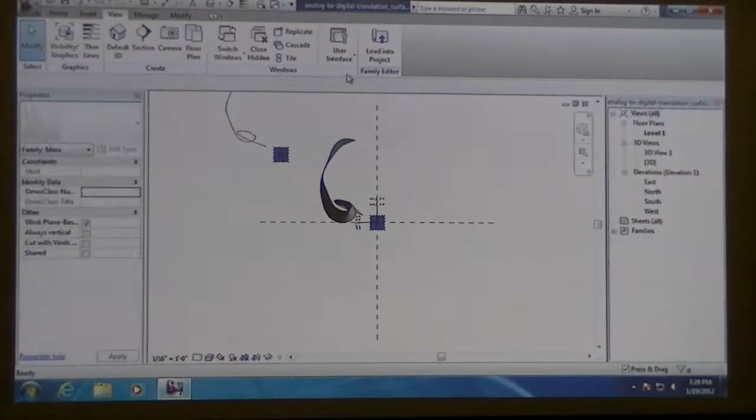So let's say I have a new conceptual mass. Where was that? This guy. And I load this in. Did you see how that selection box popped up? If you have multiple families open and start to load things in, it's going to ask you which file you exactly want to bring it into. And so I had a type 1, and if I do type 2, you see that curve goes away.

So again, later on, that might be another option. You might have additional geometry and forms that might be associated with one particular type that you could actually turn on and off, once you've brought it into the next environment.

That's really all I'm going to go over today because I think that's a lot to take in. What you need to do is start to play around with these parameters and what I've gone over in class. I'm going to post another tutorial covering what I went over in class today. It'll probably come out over the weekend.

Let me tell you what's going to happen next week. Next Tuesday, I'm going to go over how we can do the rest of our model, because so far we've been dealing with the complex form, the funky form part.

I'm going to go over some quick methods, which are going to be very similar to what we've already done for your walking paths. Some of you have towers, so we'll go over what if you have different platforms.

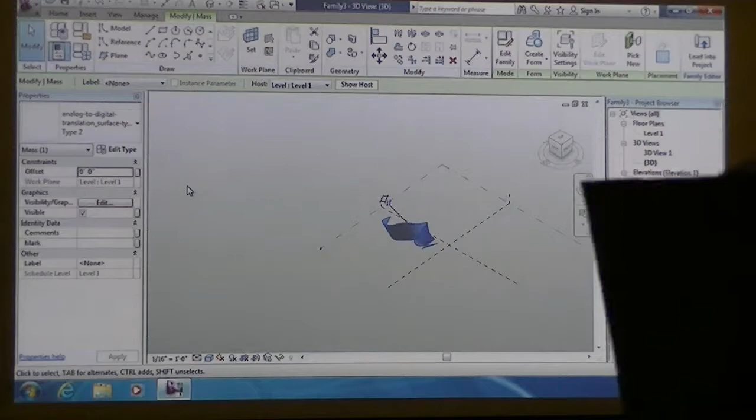We'll get into all that after I get back. But what we're going to need is your base geometry in there, so that while we're working in class we have something to apply it to and actually experiment with the different ways of utilizing the adaptive components.

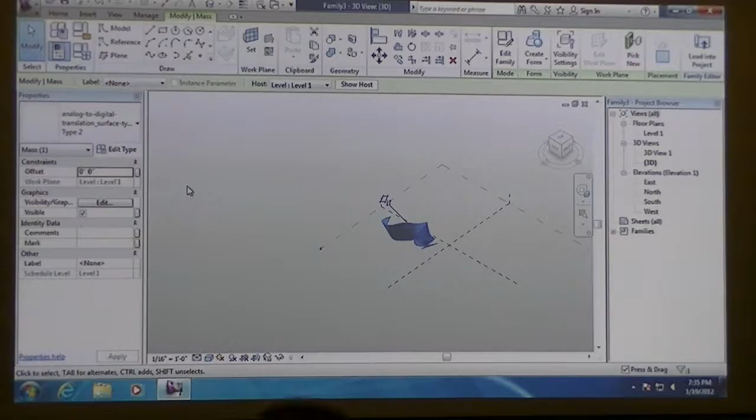Yes? Okay, so if I'm going to make this wave line with 10 points, and then sit there and make all these curves on stuff like this, 10 points seems excessive for that. Well, I think it's going to be different for everybody, so your worst case kind of condition may...